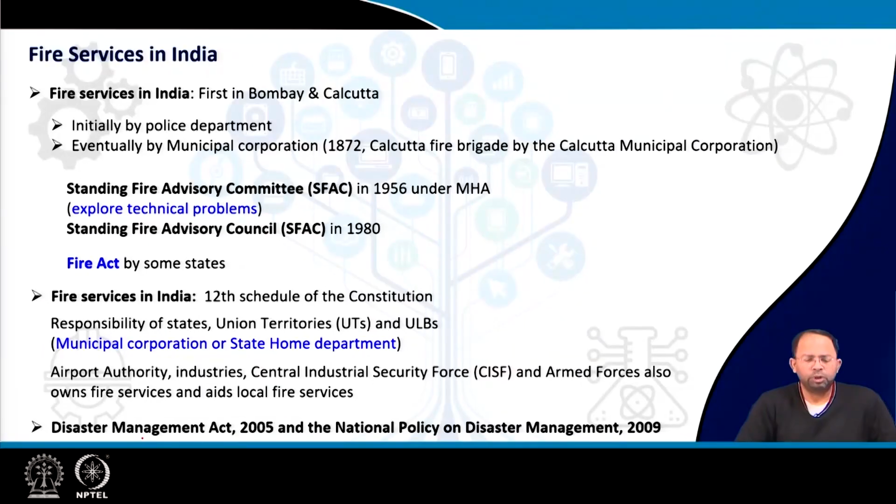Fire services in India were initially started in Bombay and Calcutta, and usually the services were first provided by the police department, but eventually it was taken up by the municipal corporation, and in 1872 the Calcutta Fire Brigade was formed by the Calcutta Municipal Corporation.

After that, during the 1950s, a Standing Fire Advisory Committee was formed, SFAC, during the year 1956 under the Ministry of Home Affairs. This committee explored the different technical problems in regards to fighting fire, what sort of equipment was required, and all these things were explored.

This committee finally led to the Standing Fire Advisory Council, SFAC, in the year 1980, and they are the ones who gave recommendations for constitution of fire acts by different states, and they also gave guidelines on what kind of fire services and equipment needs to be provided.

Based on the recommendations of the Fire Advisory Council, several states came up with their own fire acts as per the recommendations, but many states didn't come up with one. So, currently the Disaster Management Act 2005 and the National Policy on Disaster Management stress on or provide a model Fire Act which could also be adopted in different states.

Fire services in India, as per the 12th schedule, are a mandatory obligation or responsibility of the states, union territories and the ULBs. In most cases either the municipal corporation takes up these services or the state home department is in charge of fire services for that state. In small towns, the home department is usually responsible for providing these services.

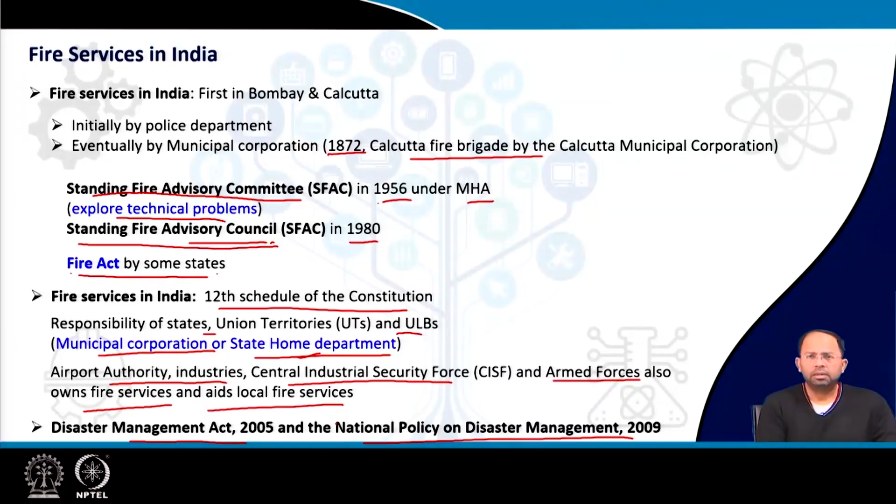In addition, airport authorities of India, different large industries, Central Industrial Security Force and some units of armed forces also own fire services, and in case of an event they also aid the local fire services. In case of major disasters, these agencies come forward to provide their expertise, manpower and equipment.

As per the Standing Fire Advisory Committee norms for fire stations, the fire stations need to be set up considering a response time of 3 to 5 minutes in urban areas and 20 minutes in rural areas. So, we will discuss about response time.

Primarily what it means is, in case an event is recorded or reported, the fire tender should take around 3 to 5 minutes to reach that particular event - that's the response time. So, how many fire stations and fire tenders you require depends on the density, the land use in that particular urban area, and the street network for that area.

Considering the scale of population that has to be served, the norm given is around 1 fire engine for every 50,000 people and 1 fire station for every 10 square kilometers of urban area, and for rural areas it could be considered as 50 square kilometers. So, in 10 square kilometers, if 1 lakh people stay, we will have 2 fire engines and 1 fire station.

The number of minimum standard equipment needed and manpower required for its operation - that is, how the fire station should be organized and what equipment should be there - are also specified in these fire advisory norms.

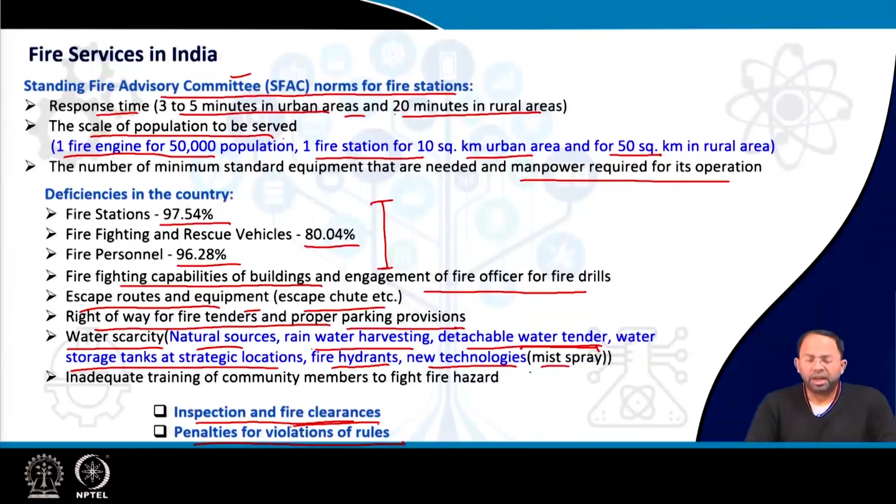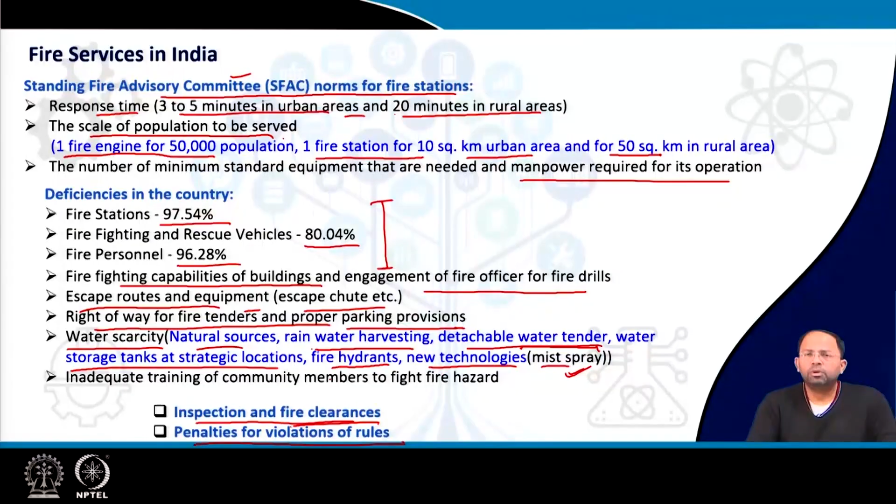Then the other aspect is water scarcity. Many of our urban areas are very dense and don't have water bodies nearby. So we have to make provision for natural sources, rainwater harvesting if required. Detachable water tenders could also be added, we can add water storage, and we can also have water storage tanks at strategic locations. Fire hydrants could be laid out, and certain new technologies such as mist spray could be considered for fighting fire, so that we can use less water to cover more area, or make provisions for storage of water at different locations.

Then finally, there's inadequate training of community members to fight fire hazards. We don't have any proper training of community members so that in case of fire they can help in fighting it and so on. So this kind of training could be conducted as well. These are some of the aspects which need to be looked at, or the deficiencies which need to be taken care of in our country.

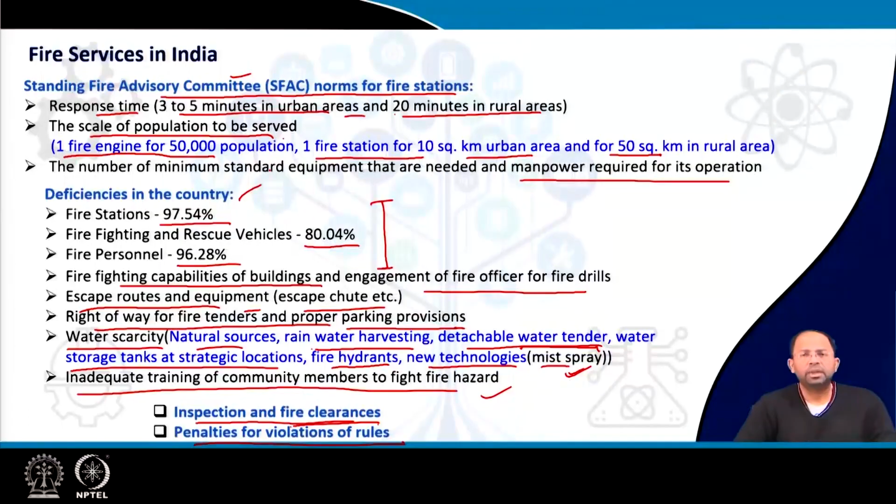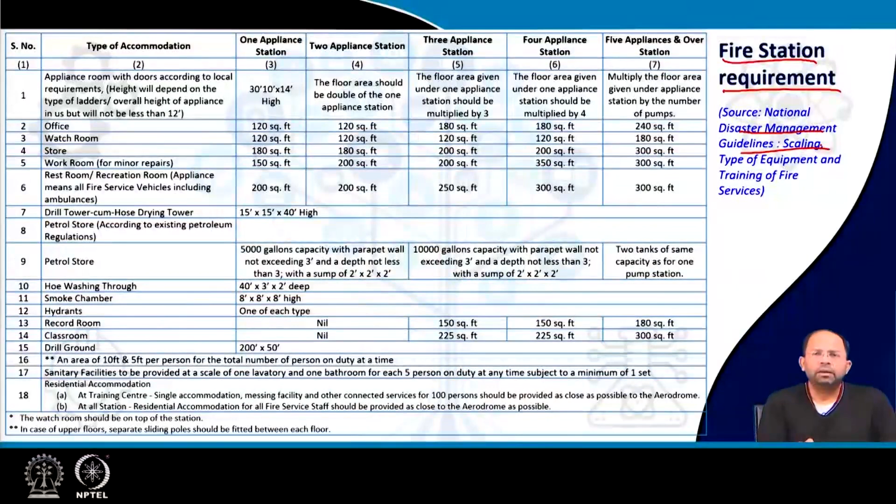Now, this chart shows the different fire station requirements as listed in the National Disaster Management Guidelines. When we are creating a fire station, or reserving an area for a fire station in an urban area, these are the different things that are required: appliance room, office space, watch rooms, store rooms, work rooms, rest rooms, drill tower, petrol store, hose washing, smoke chamber, hydrants, record room, and so on. So these standards are given.

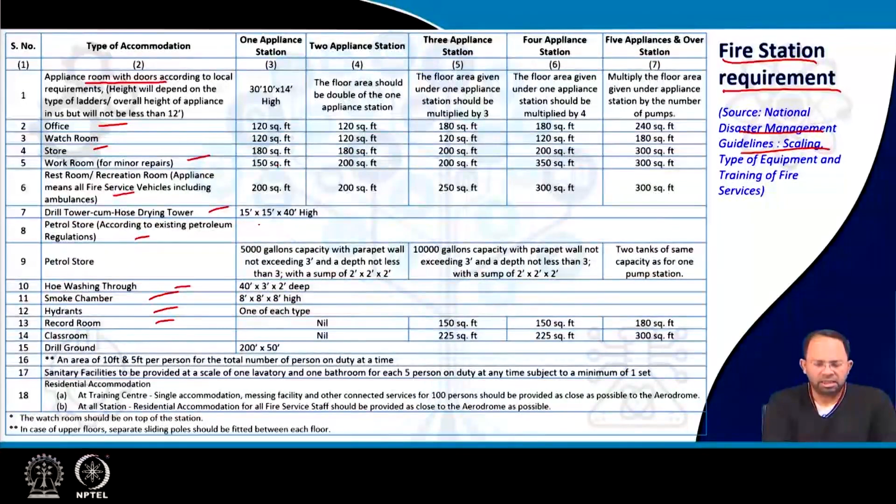As you can see, for a single unit fire station or a one tender fire station, these are the values given over here. For multiple units, the floor size is multiplied, and we have a different set of requirements for larger fire stations as well. So these are standards which could be followed to determine, for a particular area or population group, how many fire tenders would be required, and for that many fire tenders we can determine the location of the fire station and what should be its size. So the size of the fire station can be determined using this particular chart.

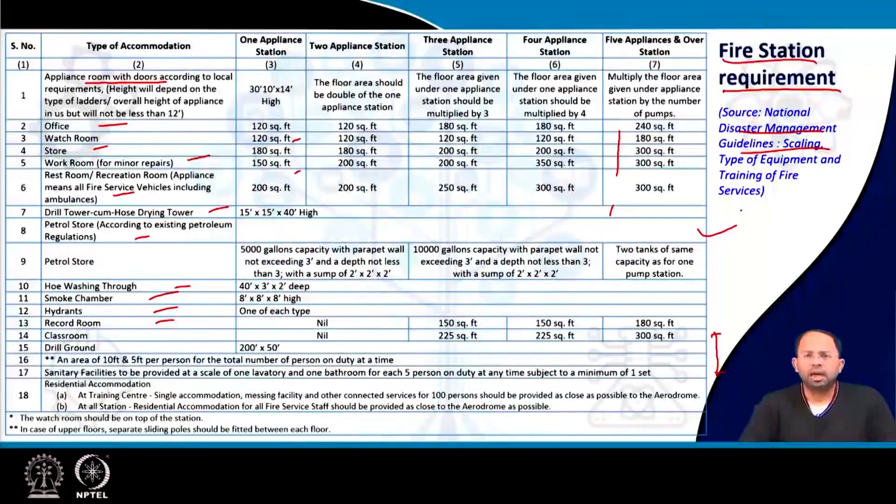So how many fire tenders are required? These are water tenders or vehicles with water tanks used for fighting fire. Usually for 50,000 people we should have 1, for 1 lakh people we should have 2, but for 3 lakh people we can have 6, and for every additional 1 lakh we should keep adding 1 fire tender.

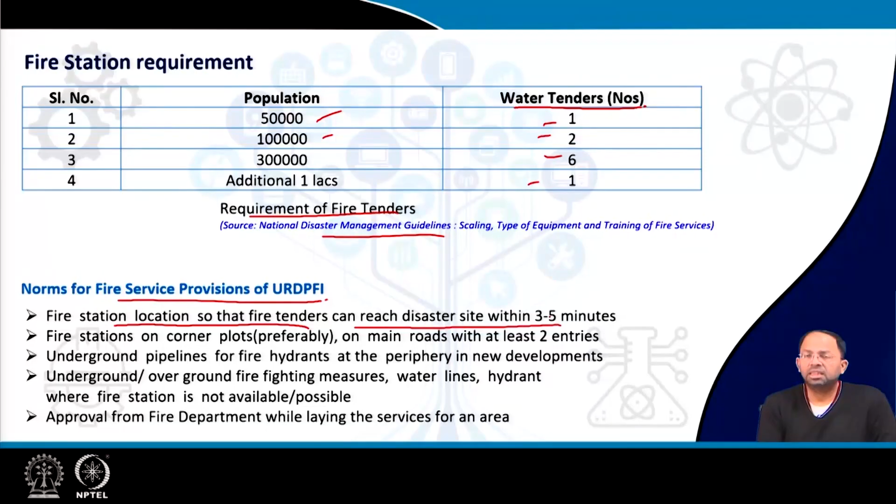This is more or less the standard given in the National Disaster Management Guidelines. As per the URDPFI, it gives additional considerations for urban planners on how to provide fire stations, so that fire tenders can reach the disaster site within 3 to 5 minutes, the same standard given in the committee guidelines.

Fire stations should preferably be on corner plots, so movement and parking of vehicles are easier. They should be on main roads with at least 2 entries, so the road is easily accessible from other areas. Underground pipelines for fire hydrants should be provided at the periphery of new developments, so fire tenders can connect their hoses and use the stored water for fighting fires.

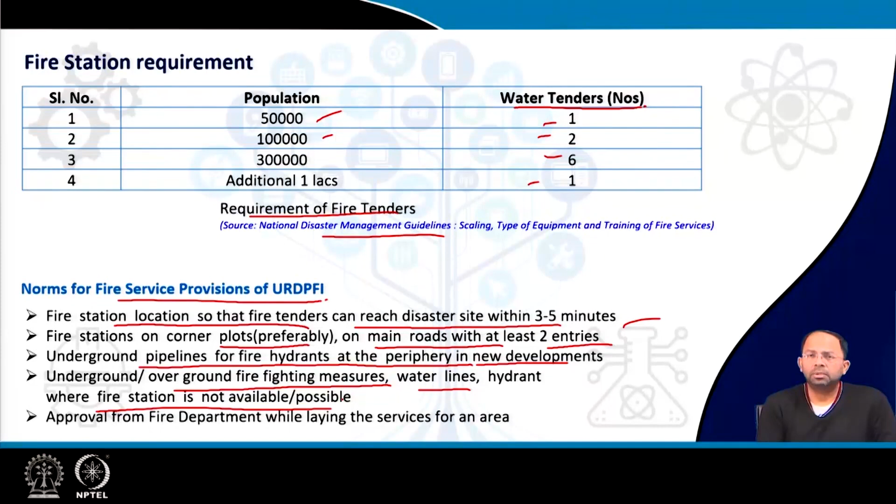Underground or overground firefighting measures such as water lines and hydrants should be used where a fire station is not advisable, available, or possible. In many dense areas, we should at least have fire hydrants that fire tenders can utilize. Also, approval from the fire department should be taken while laying out services for an area, since multiple fire hydrants and related services need to be planned.

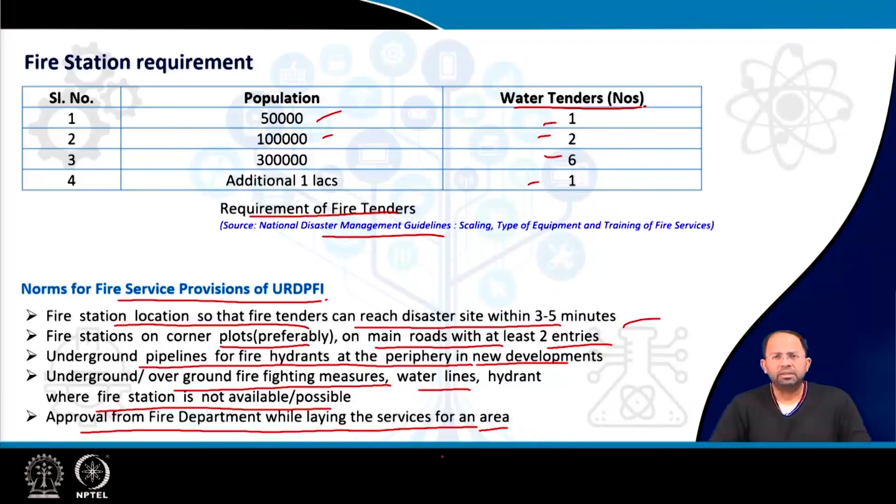Now coming to emergency fire service design, there are different things we need to first understand. For example, first we have to understand the fire demand zone. How do I categorize different areas and say this is one zone and that is another?

A zone should have relatively homogeneous land use, meaning it should be roughly uniform. It's better not to mix an industrial area with a residential area, because the hazards and risks are different. We should have different provisions for fighting fires in industrial areas compared to residential areas, which is why zones should be made relatively homogeneous.

So a zone can be a single complex of buildings, a factory producing or using hazardous material, a church, a hospital, or an area of relatively homogeneous structures like a residential area. Now, how do I determine the requirement for that zone, or the distance from it? For that, we determine the demand for fire service within a zone.

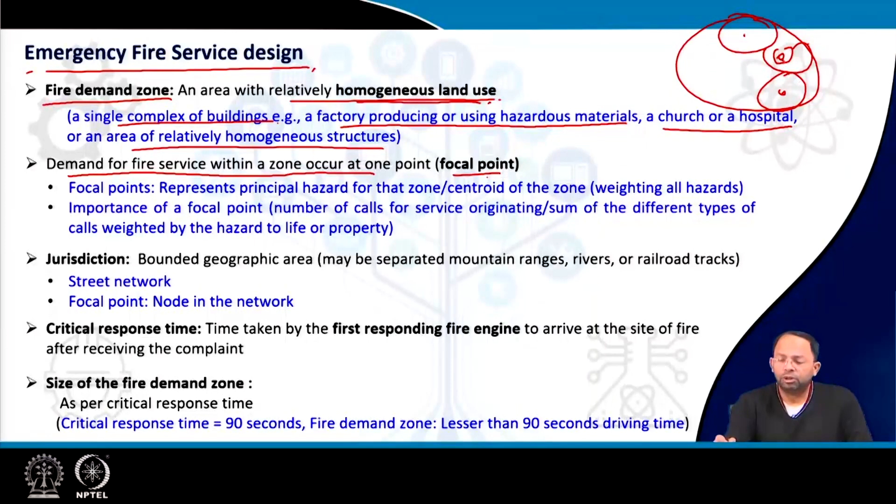We determine a single point, the focal point. If I have a large area, we break it into different zones, and each zone could have a focal point. The focal point could be the centroid of the zone, or it could be the major risk or structure susceptible to fire, which becomes the focus of that zone.

Whenever we measure the distance or time for a fire tender to reach a particular zone, we measure it from the location of the fire station to this focal point. The focal point represents the principal hazard for that zone, or the centroid of the zone, which could be considered by weighing all the hazards.

For example, in a zone we might have an industry and a residential area, each with different levels of risk or hazard. Based on that risk we give weightages, multiply accordingly, and determine the approximate centroid for that zone. So it may not be the geometric centroid, but one weighted by distance from the different risk levels at different parts of the zone. It's essentially a representative point in that zone used for further calculations of distance and other factors.

Jurisdiction is the bounded geographic area, which may be separated. It could be based on administrative boundaries, but it can also be separated by a mountain range, a river in between, or a railroad track. All these things need to be considered when we define the jurisdiction, and we can divide it so that one fire station serves this part and another fire station serves another part.

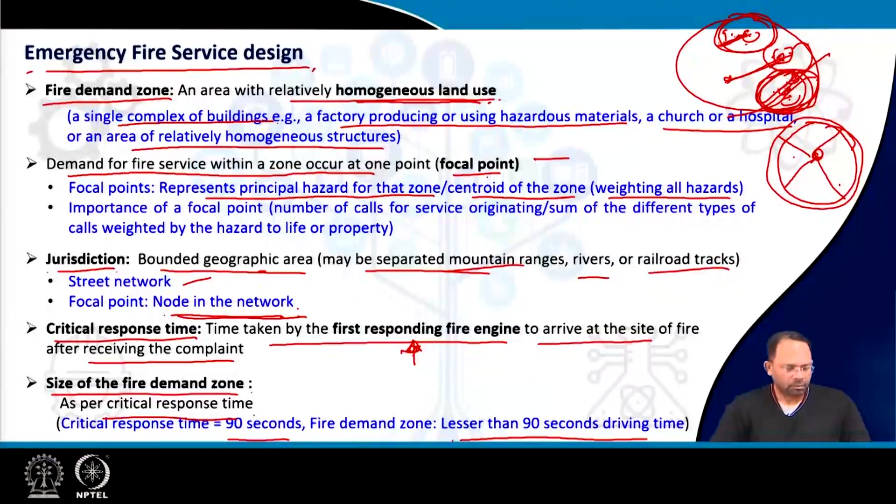Next comes the classification of different risks. Different areas have got different risk levels. For example, flammable and explosive risk factors are there for gas stations, LPG stations, and factories. For general hospitals and schools, these people are vulnerable, meaning they have to be evacuated, and there need to be stretchers to carry these people, so that kind of provision has to be made.

Shopping malls, supermarkets, entertainment venues, subways, and train stations are crowded, so you need to manage the crowd and require other sorts of manpower. Government offices, scenic spots, scientific premises, libraries, science and technology museums, archives, and galleries are key areas which need to be protected. Residential areas are general fire protection areas, and emergency shelters are emergency protection areas.

Accordingly, we can classify these areas as per different kinds of risk, and based on that, determine what sort of services or equipment we should carry, or how important that risk is. All these things can be determined from this.

In addition, we can map other hazards as well, such as geological hazards like subsidence, meteorological hazards, biological hazards, human-caused intentional events like terrorist activity, and technological hazards based on certain failures of technology. So all these different kinds of hazards could also be present in an area, and that needs to be considered.

Along with determining hazard and risk, we can categorize the different zones. Once the zones are segregated, each zone can be given a focal point. We can determine the response time to that particular zone, and based on that, determine the number of stations needed. Along with that, we also need to develop communication, early warning, and operational procedures for fire services.

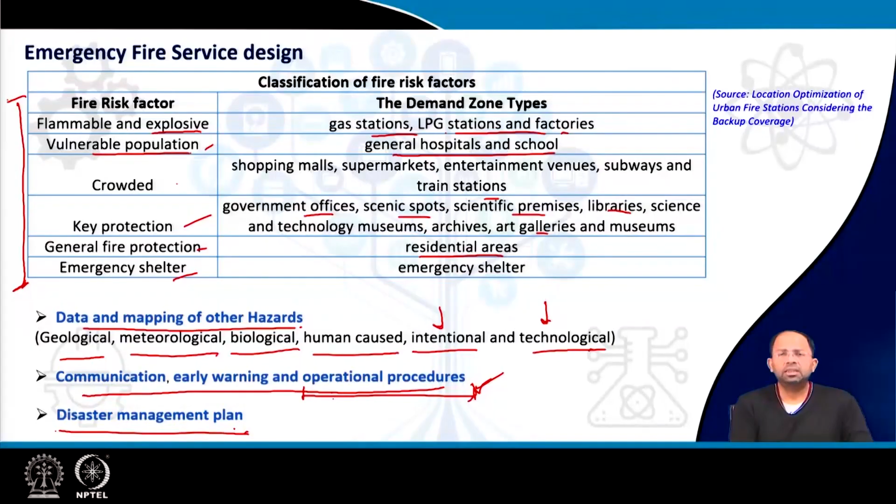So to determine what sort of hazards and the timing of those particular hazards, we need to create certain databases.

Fire and rescue calls and their timings for the last 5 years are usually recorded. For example, total number of fire and rescue calls coming from a particular area, such as number of fire calls, rescue calls, gas leaks, building collapse, hazardous material calls, animal rescue calls, and other calls. Similarly, we record data on lives lost, lives saved, number of injured, property saved, and property lost in financial terms.

Based on all these records, we can determine which zones are more hazardous, what kind of hazard it is, and accordingly designate separate zones in an area.

We also record the timings of different calls received, from 7 in the morning to evening, and from evening through the night to 7 in the morning again. So we can record what time of day the calls are coming in.

This helps us predict the requirement for staff and equipment at different times of the day and even in different seasons. This helps us do trend analysis to determine what kind of manpower we should have at different points of time and what sort of preparedness we should maintain.

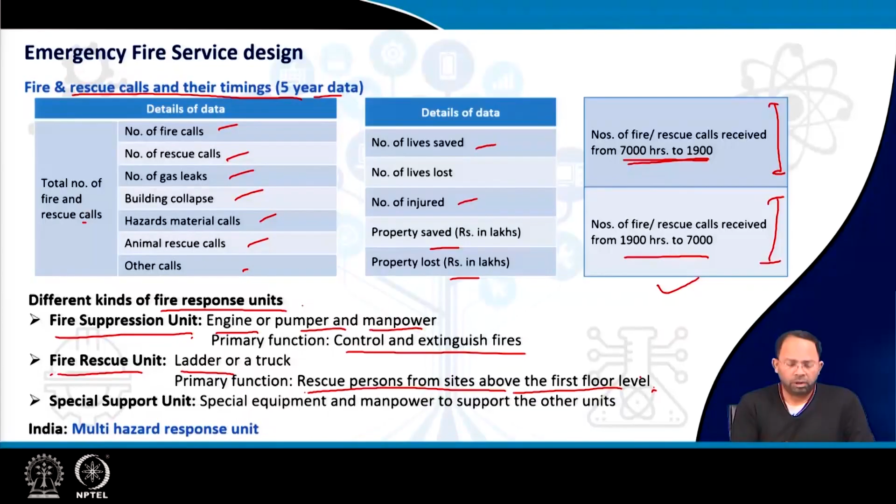Then there are special support units which have special equipment or manpower to support either the fire suppression unit or the fire rescue unit. In India, we usually have multi-hazard response units, meaning units can respond to multiple kinds of hazards. So we have different kinds of personnel inside each unit that can be utilized to respond to different problems.

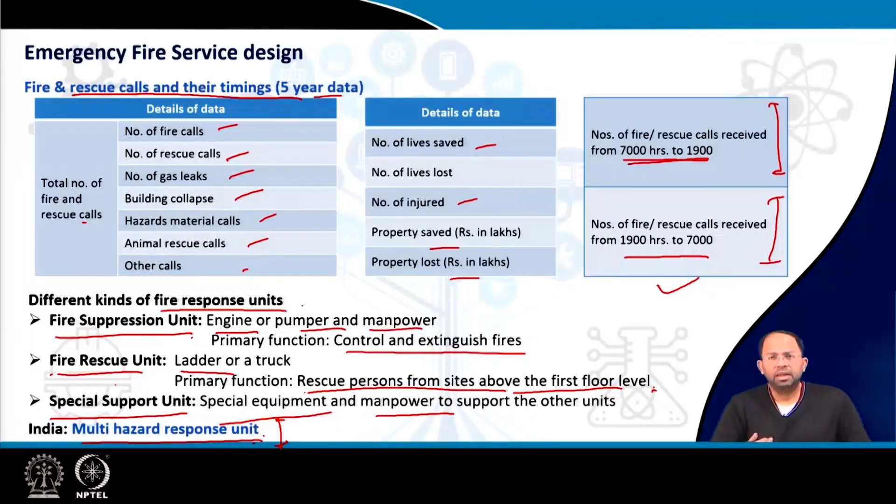Now for response time, we have to determine how to do location allocation of fire services - how to distribute the different fire stations in an area. The response time is the primary factor that we have learned.

It depends on the area where the incident has occurred and the pattern of fire incidences. In an area where fire breaks out very often, there could be multiple fires at one point of time. Based on the incidence patterns from recorded data, we can determine that, and also the area density and what sort of people live there. All these things play a role in determining what sort of response I should provide and in what time I will be able to provide it.

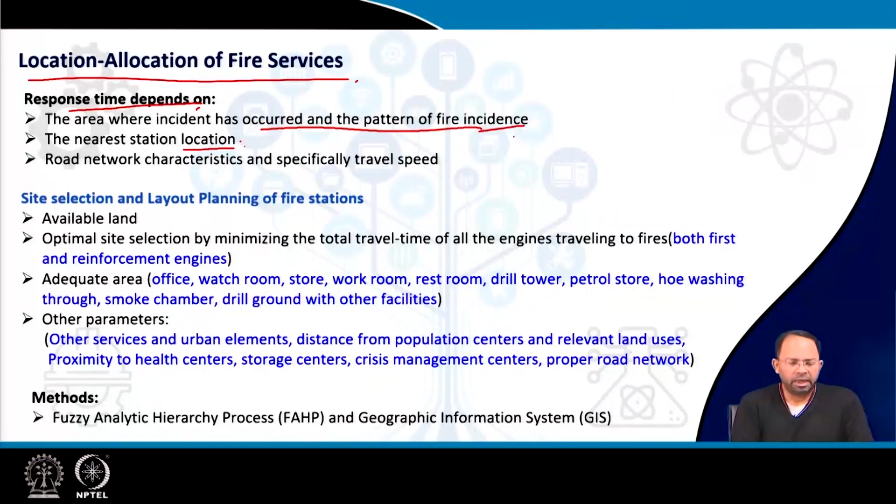Then the nearest station location from that particular area and the road network characteristics, specifically the travel speed possible in that area at that point in time. This overall determines at what distance and density we can locate fire service stations in an urban area.

Site selection and layout planning for fire stations is based on available land, which is primarily government land, and then optimal site selection by minimizing the total travel time of all engines traveling to the fire.

We could determine one dedicated fire station or fire tender for one area, or we could consider that multiple engines will travel to that area from surrounding zones, minimizing the travel time of all engines together. So this is basically a location allocation problem.

In GIS, we can solve this very easily using some tools. We can determine the location of the fire station as per the distribution of fire events and so on. In case of multiple engines, both the first and reinforcement engines, both their times are considered, and accordingly we determine the suitable location for the fire engines.

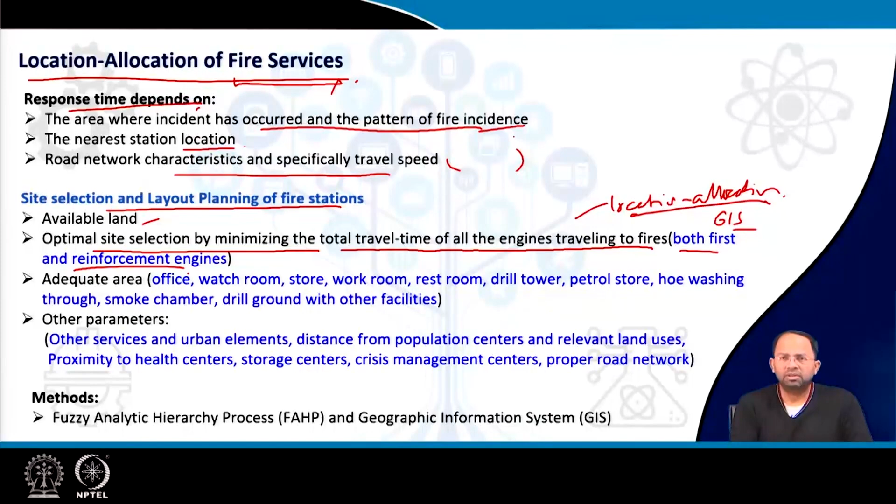For example, the way we go about is, I have the city, we divide it into different zones. Now I locate the fire stations based on available spaces and all these things. So this becomes one option, and some locations could be skewed. Then we put a distribution of fire events and see what is the minimum time in which this could be addressed for different fire events. Based on that, we can minimize the overall travel time for that area and determine the best possible scenario for locating fire stations in that area.

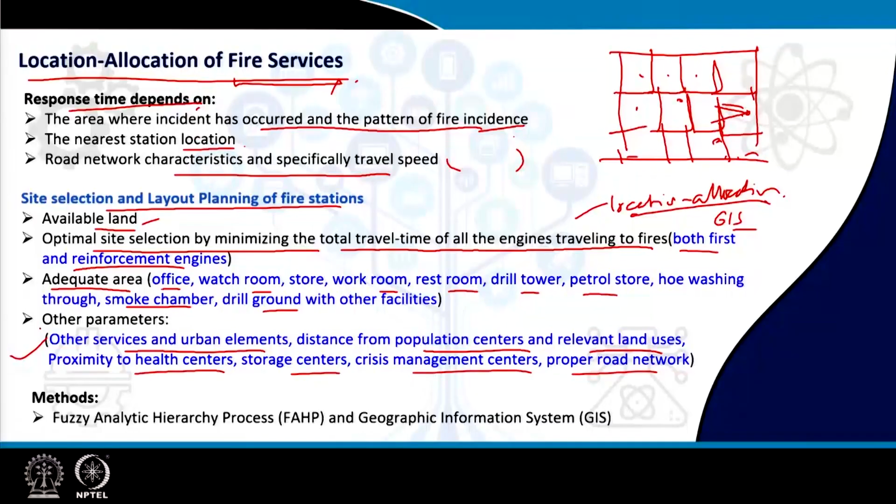The other considerations are not only available land, but how much of it, whether there is adequate area or not. There should be space for offices, watchrooms, stores, workrooms, restrooms, drill tower, petrol stores, hose washing, smoke chambers, drill ground and other facilities. Other parameters such as distance from other services, distance from population centers, relevant land uses, proximity to health centers, storage centers for equipment, crisis management centers, proper road network - all these things also play a role in the selection of location for a fire station.

People use different techniques for determining this. It's basically a two-stage procedure. The first stage is to consider all these parameters and determine how important they are in the decision making process. So usually people use fuzzy AHP processes - it could be an analytical hierarchy process or fuzzy analytical hierarchy process.

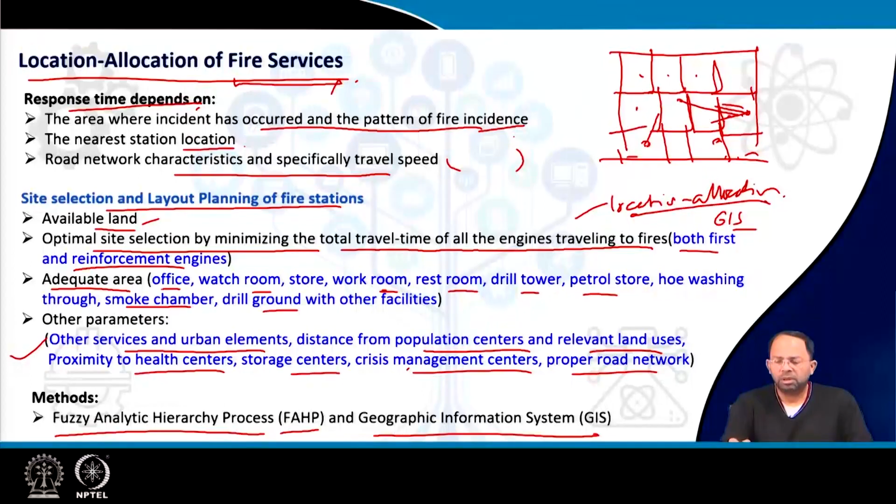Then geographical information system is used to determine the travel time or response time to different fire events. Based on these two data - the importance of that location as well as response time - we can take a call on which is the best possible scenario for setting up a fire station, or which possible locations are best suited for setting up fire stations in an urban area.

The allocation models could be of different types. One could be a time constraint model, where in the conventional approach, the idea is a station has to be located within a given distance or time of each focal point. We have different focal points in an urban area, more hazardous areas and so on. So the fire stations have to be located in such a way that they are within a travel time, given distance or time from that particular focal point. This is a constraint-based approach - a constraint of travel time.

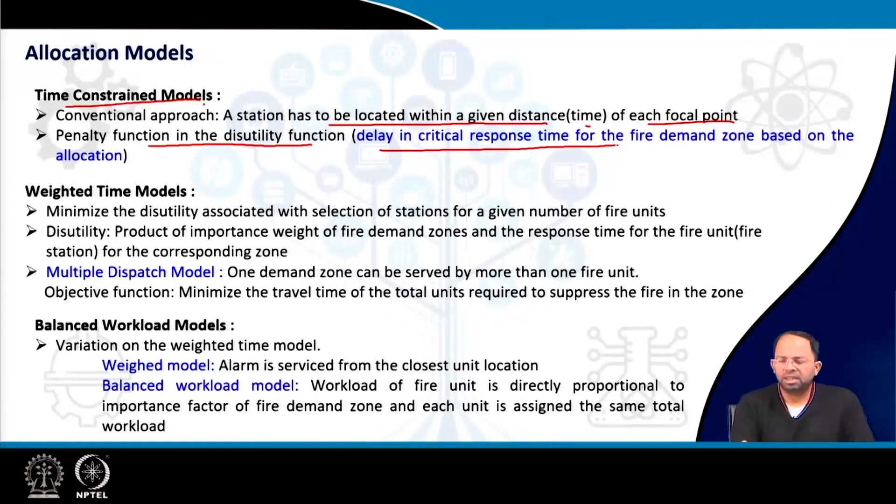The penalty function - we can use disutility functions here as well. A penalty function is introduced where the delay in critical response time for a fire demand zone is determined based on the allocation. Suppose we have a certain scenario of allocating fire stations in an urban area - if I do this sort of allocation, what is the overall delay that is happening? We determine the delay in critical response time compared to the standard, then change the locations, and for another scenario create locations at another point, and again determine the delay. Wherever it is least, we adopt that as the best possible option. But initial locations are selected based on other factors, weightages and so on.

The weighted time model is where we minimize the disutility associated with selection of stations for a given number of fire units. The disutility is determined by the product of the importance weight of the fire demand zone and the response time for the fire unit. So it's not only based on response time, but also on the importance of the fire zone - if an area is important, and I am delayed in reaching there, there is more chance of damage. That's why the importance of that area is multiplied with the response time, and overall we determine the disutility of locating these stations, then determine which option is best, and choose that option.

Now, multiple dispatch model is a modification of the basic model. In the basic model we only consider one demand zone can be served by one fire unit, whereas in the multiple dispatch model we can assume one demand zone could be served by multiple fire units from other areas. So the objective function is to minimize the total travel time of the total units required to suppress fire in the zone.

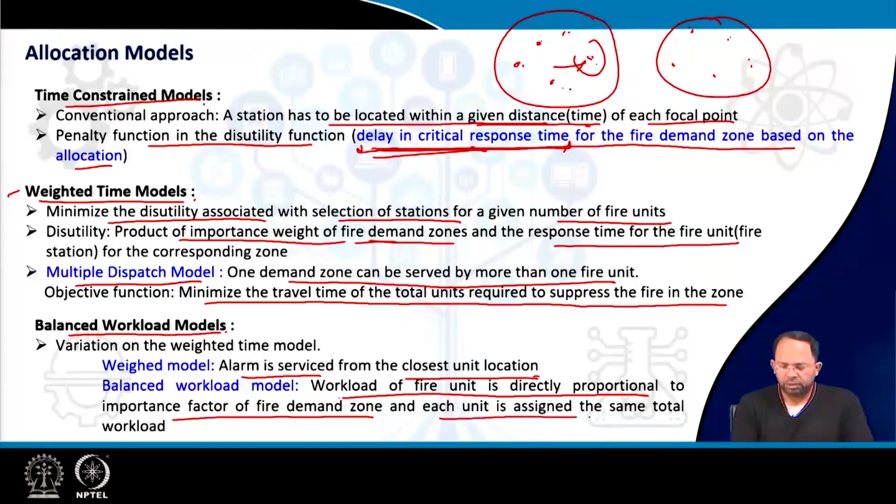But in case of the balanced workload model, the idea is workload of a fire unit is directly proportional to the importance factor of the fire demand zone, and each unit is assigned the same total workload. So that means every unit's workload should be similar.

So one unit can reach a certain area, another unit can reach a certain area, but the location of the unit should be such that overall workload for this particular unit is the same, because the hazard and all these things are different for this area. So overall workload needs to be balanced for all the different units. This is a much more complicated way of doing this.

So this is the most basic way. This is where a little bit of complication comes in, because you have to understand the importance of each zone, and this is further complicated because we are considering multiple fire units responding to one zone. We can do that here as well, but here we have to understand that each unit has got different workload. We have to balance not only the response times and the importance, but also how much work each unit is doing, and that has to be prioritized.

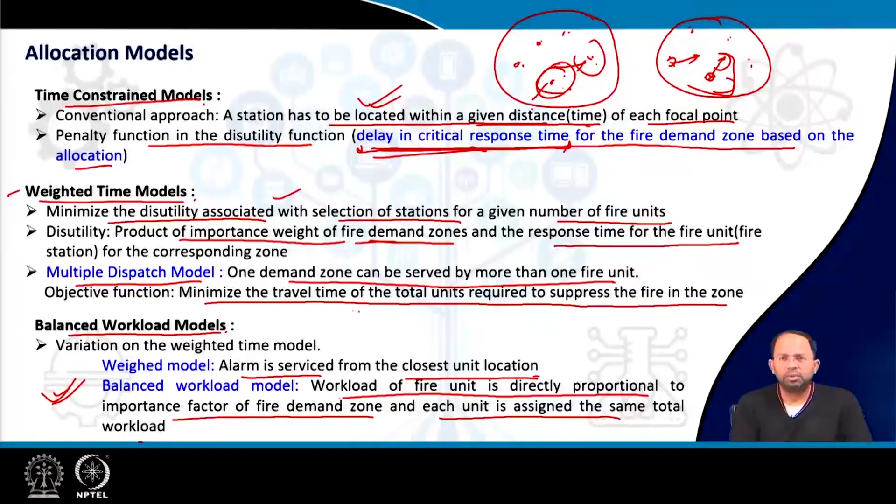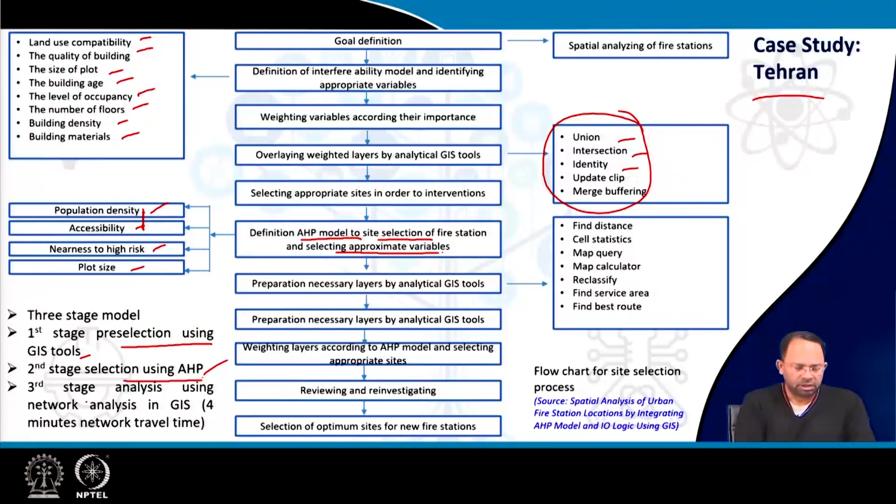So the third stage of analysis involves network analysis. Using network analysis in GIS, we can determine from any point or location of the station what is the time to reach all the other points. So we can add this all up to determine a figure for the total amount of time taken for response. Multiplying with the importance of that particular factor and the response time, combining all these factors, the location of optimum sites for fire stations are determined in this particular study.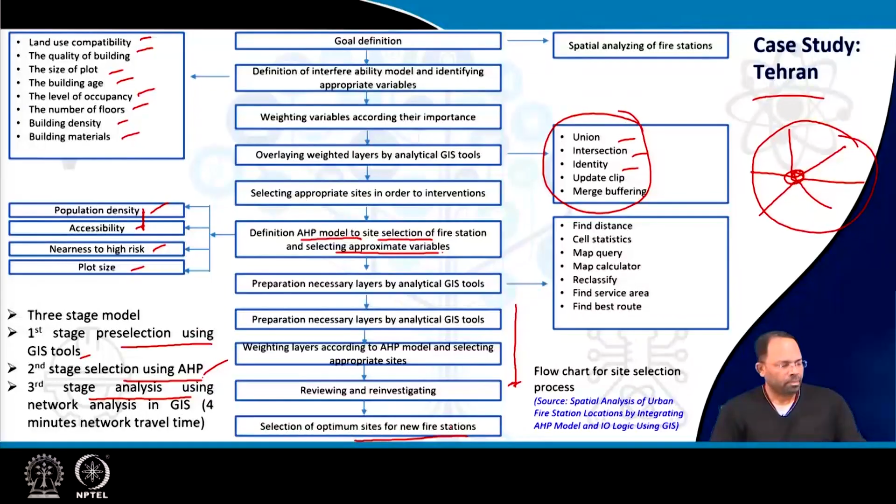To conclude, efficient, well-planned and well-equipped fire services are essential to respond to fire events, and significant deficiencies in regard to fire services in India need to be addressed through adequate funding and technological interventions. Thank you.